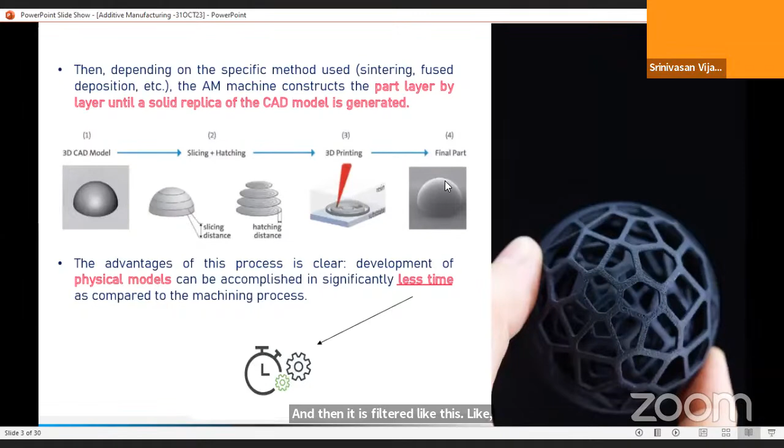This is very important actually. Friends, are you able to see the full screen, or is there any hindrance here? Screen is fully shown, huh? Yeah, full screen visible, sir.

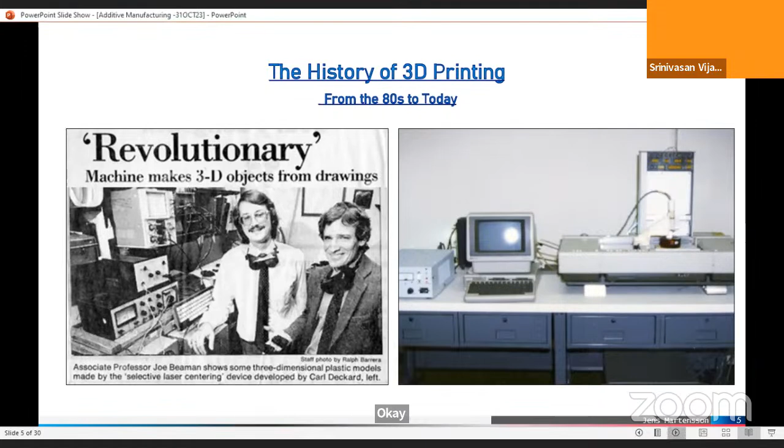What is the use, why is there a need for additive manufacturing? First of all, we have to discuss the negative part of the subtractive manufacturing process, because machining is a subtractive process.

It begins with a solid piece of stock. The machinist must carefully remove material until the desired geometry is achieved. If it is not achieved, or if he makes some mistake, then that part will be rejected. So it is an exhaustive and expensive process. Some complex parts shown here are very difficult to make even by forming processes like casting and machining. It is a tedious process to develop these kinds of components, requiring a higher degree of accuracy for such holes, etc.

So in this case, additive manufacturing significantly replaces other manufacturing processes, especially the other two manufacturing types: subtractive and formative manufacturing.

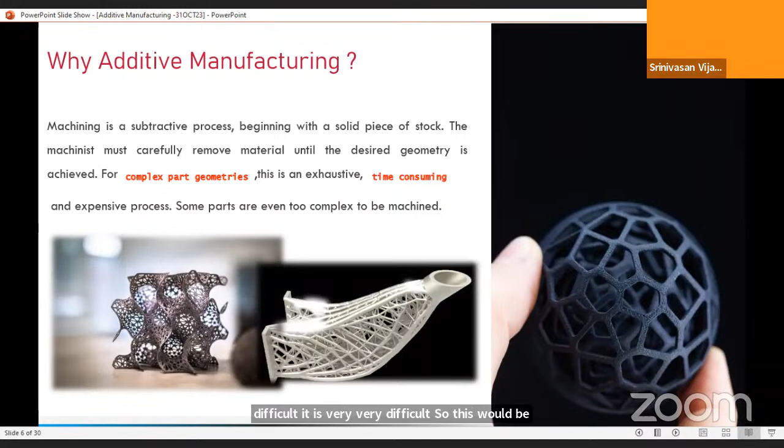Complex geometries are time-consuming in other conventional manufacturing processes. That is the reason why additive manufacturing is very important for the current scenario. If you look into this model, is it possible to manufacture it through forming, casting, or machining process? How difficult would it be? Very, very difficult. So this could be one of the reasons why additive manufacturing is necessary and is the current trend now.

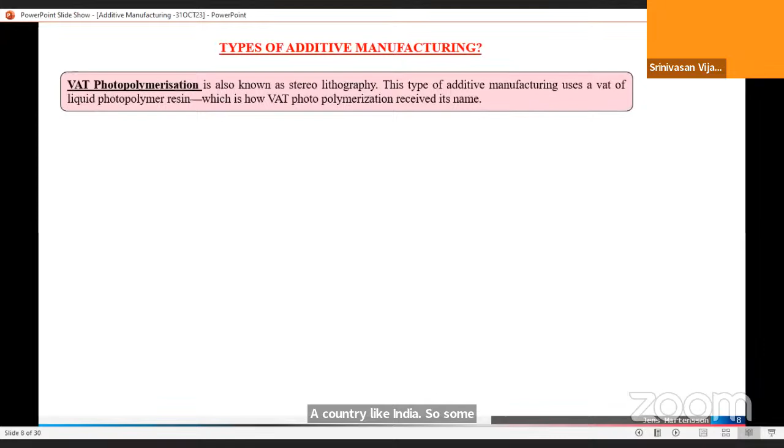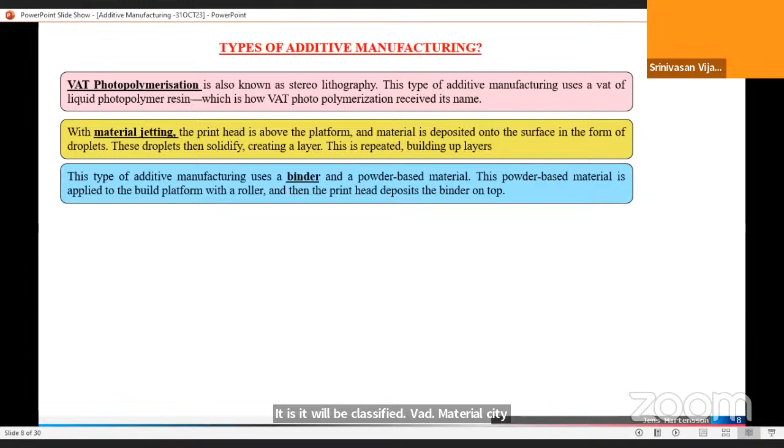Some of the types of additive manufacturing are shown here. It may be classified as VAT photopolymerization, material jetting, material extrusion, powder bed fusion, sheet lamination, and directed energy deposition. The most commonly used process is powder bed fusion, especially in India.

Let us discuss what is VAT photopolymerization, because even though this is important, we must know some introduction about it. It is stereolithography - it uses photopolymer resin.

Whereas in material jetting, the print head is above the platform - we can show it in the diagram. The material is deposited onto the surface in the form of droplets. These droplets then solidify, creating a layer, and this building up of layers is repeated.

The third one is material extrusion. It is used in inexpensive home 3D printers, where the material is drawn through a nozzle, heated, and then deposited in a continuous stream.

And then the powder bed fusion - even though it is costlier, very expensive, it is widely used in India, but you can't get it everywhere. Only one or two facilities in each state, most probably. The two in Chennai or Bangalore, Hyderabad - in metros only we can have this facility, and some other national laboratories have this.

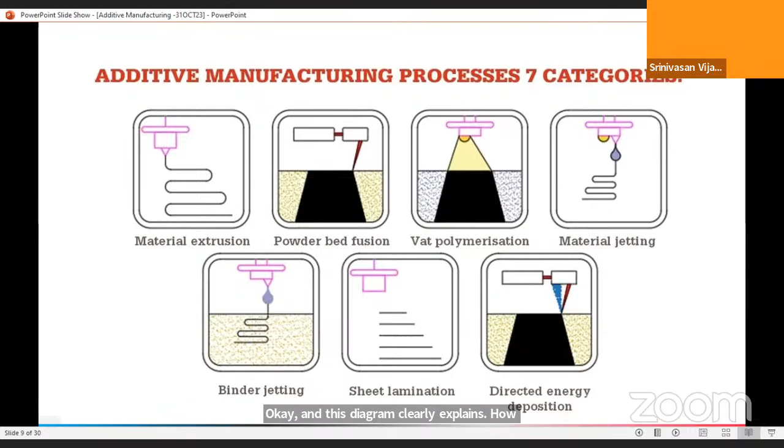And these are the different types of additive manufacturing processes - the diagrams are shown here. I can share the slides later with you. These diagrams clearly explain how additive manufacturing has been classified into these seven categories.

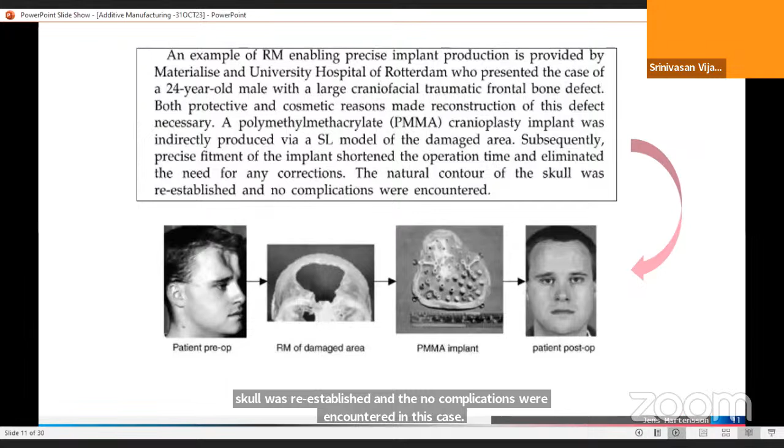What are the recent researches and development in PBF? It is powder bed fusion or laser bed fusion, whatever it is.

Here we have presented two case studies, both taken by my research scholars. One is Subanth Entar, who just completed his research and defended his Viva presentation, receiving his doctoral degree in the title: Impact of Scan Orientation Strategy and Melt Pool Behavior on the Mechanical, Microstructure and Tribological Characteristics of DMLS IN718 alloy.

Don't confuse with that - PBF, LBF, and DMLS all mean the same thing, that is direct metal laser sintering. DMLS stands for direct metal laser sintering. They have also backed a patent and introduced a new scan orientation strategy concept, which is why we have applied for patent.

We fabricated the samples through DMLS process with different scan strategies. First we took the scanning direction at 67 degrees, then scanned at 90 degrees, then combined together both 67 and 90. So we produced three materials and did our research on melt pool behavior, microstructural and tribological characteristics.

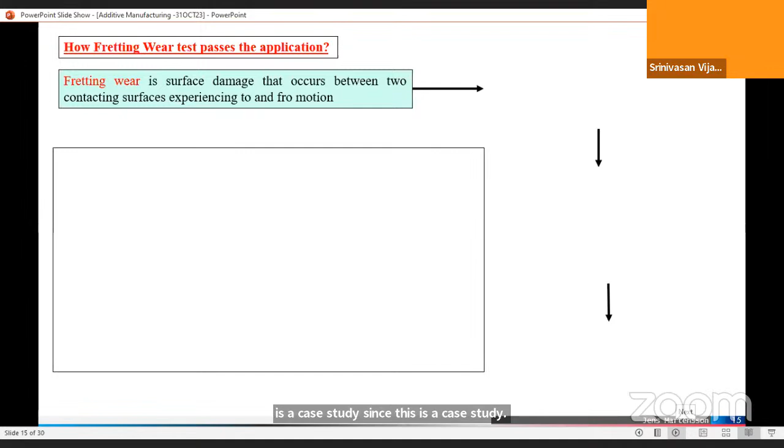So how we made a fretting wear test. Actually, most of the people discuss pin on disc wear test, that is for sliding wear. But in this case, this is a case study. Since this is a case study, we took fretting wear, which is a surface damage that occurs between two contacting surfaces, giving to and fro motion, as shown in the diagram.

There are different types of fretting: tangential, radial, rotational, torsional, etc. This is the exact application in aircraft wing rivets, where we have to specify like this. Youngsters, those who are choosing a problem, have to specify the problem like this: I'm having this problem, there could be some problem.

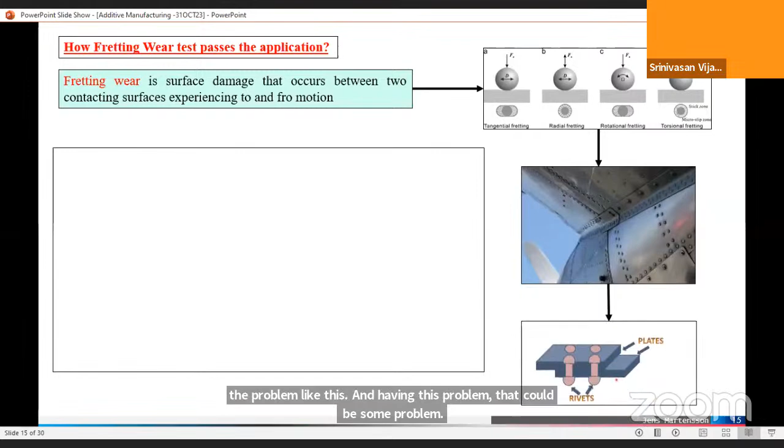We were able to produce a component with a higher degree of fretting wear resistance, and less shear stress in aircraft wing rivet. This is what our study concluded, and we are moving to the second case study, which we are currently involved in.

Another scholar named Mr. Daniel Devaraj is doing this research. We are in the phase where already 2 papers have been published with this, but we are waiting for thesis submission. I want to share some of our experiences, what we did, how we managed to do our research in biomedical engineering. Here, the problems with bio implants are clearly discussed, under different categories we can classify these problems associated with bio implants. These are based totally on reference to some journals.

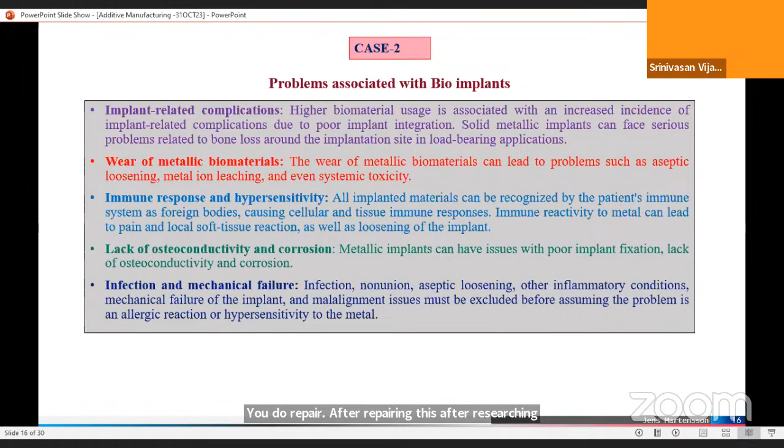Most importantly, I don't know how many of you have come across the term stress shielding effect. It looks somewhat complicated, but it is very simple. Just look at this, this is a femur bone. Look at this arrow mark. This is the femur bone, this is the femoral head, and this is the acetabular cup.

Let us assume I'm placing a titanium or stainless steel implant here. This is stainless steel. The elastic modulus, or stiffness, of stainless steel implant manufactured through conventional processes is around 200 gigapascal, whereas for bone it is 30 gigapascal — nearly 600% difference between the bone and the implant.

So what happens? The stress given to the implant must be transferred to the bone. Then only the bone will grow, and only then will blood circulation get into the bone areas. Otherwise, this implant will shield the load, protecting it from entering the bone. All human bones must experience some kind of load, otherwise bone growth will be affected. This is what we have to look into from a biomedical point of view.

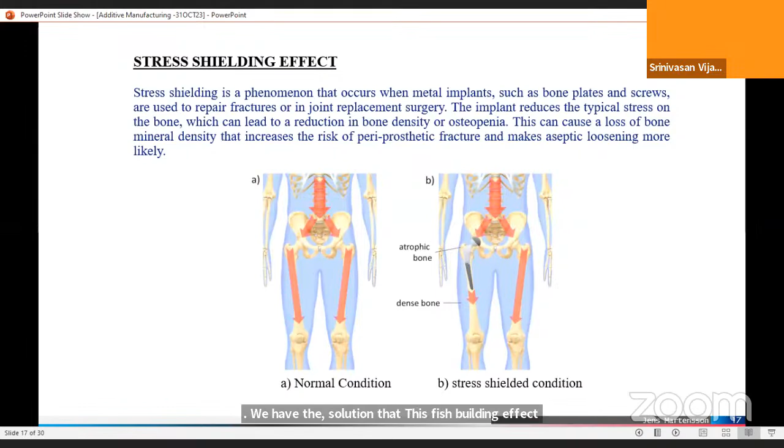But what they might have done is some kind of alternating arrangement — they might have increased the surface roughness. I gathered this from a journal where they modified the surface roughness according to the adjacent bone for the stress shielding effect. But nowadays we have a clear solution: the stress shielding effect can be reduced through the additive manufacturing process. Let me explain how.

So these are the ways to prevent stress shielding in bone implants. Increasing the bone implant contact ratio can help distribute the load more evenly between the implant and the surrounding bone, reducing stress shielding. This can be achieved through proper implant design and surgical techniques. I'll tell you clearly now — after reading this, I'll explain what we did to reduce the stress shielding effect.

Improve implant surface roughness. Modifying the surface roughness of the implant can influence the stress field in the periprosthetic bone tissue. A more optimized surface roughness can help reduce stress shielding and improve the long-term stability of the implant.

We use materials with a closer match to bone. Now the closer match to bone is only beta type titanium, which has low Young's modulus, that is 110 gigapascal, manufactured through conventional manufacturing process. I'll come back to how we can reduce this Young's modulus for titanium further.

And then functionally graded materials, where alternating layers have a gradual transition in mechanical properties from the implant to the surrounding bone. One of my scholars did research on functionally graded material for bioimplants through centrifugal casting. He used magnesium-based composites where he used molybdenum and zinc as a functionally graded material.

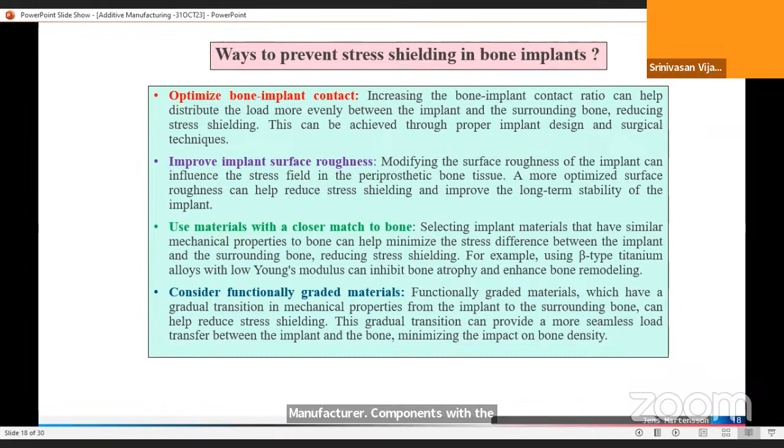And the best solution for reducing the stress shielding effect is to produce components with a higher degree of porosity. That's all, this is the only solution. You produce a component with pores. If you have many pores, the density will be reduced.

Inside the pores, the bone will grow and clump together. That stress attained by the implant will be shared to the bone effectively.

But what is the exact percentage of porosity? We don't know, it is still in research process. In our study, we took 40, 50, 60% porosity. So for that, we have to develop a 3D model.

There are a lot of structures available. Porous scaffold, this is diamond scaffold. This is gyroid structure. Our research, my scholar did his research using this gyroid lattice structure. Using topology software, we were able to reduce it.

Just a minute. Okay.

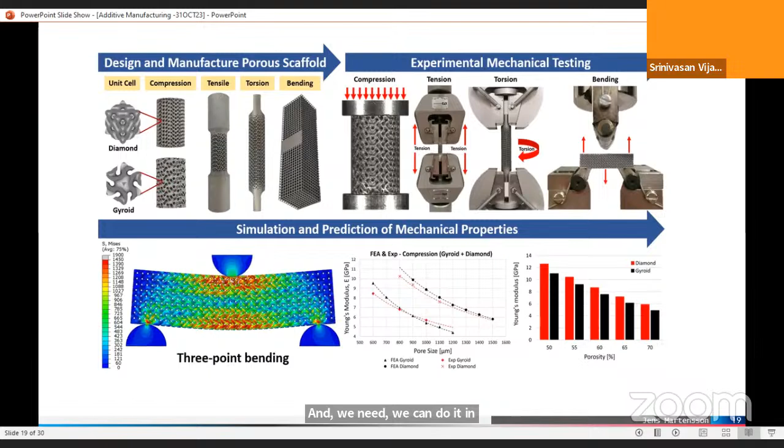Now the current thrust area, let me tell you, a lot of studies have been done in stainless steel. Please leave that aside. We can do it in titanium, and cobalt chromium alloys are the latest trend where the current research is going on.

And we did our research, taking micro hardness. Look at this, for cast titanium alloy, which has 358 micro hardness, whereas these are all gyroid structures with porosity, which retain and increase their hardness, because of metallurgical reasons, as cooling rates in the lower temperature range when critical solid state phase transformation occurs.

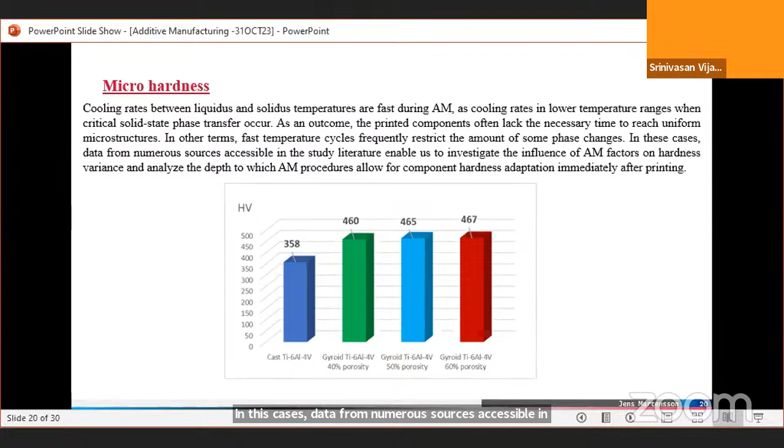As an outcome, the printed components often lack the necessary time to reach a uniform microstructure. That is, fast temperature cycles frequently restrict the amount of some phase changes. In these cases, data from numerous sources accessible in the study literature enabled us to investigate the influence of AM factors on hardness variance, and analyze the depth to which AM procedures allow for component hardness adaptation immediately after printing.

Here I have given the hardness, as well as we did a pin on disc wear test. In the previous case, we did a fretting wear test.

The application is totally suitable for aeronautical applications. In this case, the wear test should be done on a hip joint simulator, which was designed by us earlier, but it was not under working conditions. So we switched over to pin on disc testing. If you look at this...

Sample C, sample B, and sample A. As the porosity increases, the coefficient of friction also increases. Look at this: sample C has very less wear rate compared to others because it has 60% porosity. That is, it has good wear resistance, even though it has higher coefficient of friction.

Why? Technically speaking, people used to think that coefficient of friction is directly proportional to wear rate, but that is not the case. The detached particles might come into contact with the contacting asperities and act as a solid lubricant to reduce the wear rate. So generally, as a blind theory, people use the thumb rule that coefficient of friction is directly proportional to wear rate. That is not the case in pin on disc wear test, sliding wear test.

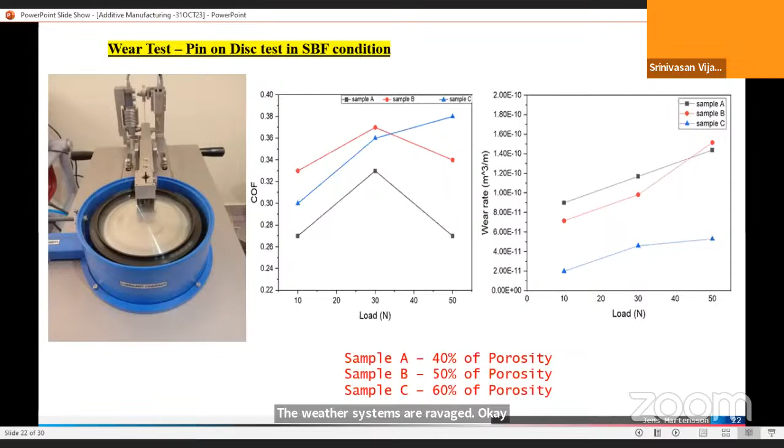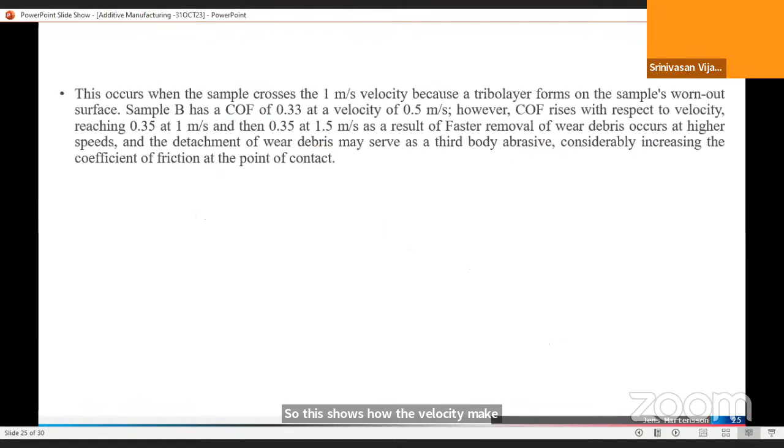This shows how velocity makes an impact on coefficient of friction and wear rate. And these are some SEM pictures showing what kind of mechanism we obtained for these oxide layers, and how the crack is initiated.

Here is the ploughing type of mechanism, here the grooving, and here the materials have been delaminated along the scratch, where we found some oxide particles.

These are some of the wear mechanisms we obtained, and there is some theoretical part which I don't want to go into because we've already spent more time on this.

I hope this presentation has given some glimpse about additive manufacturing and research gaps. Simply, we can classify this: don't choose additive manufacturing blindly and do all tests - tension, compression, tribological - without a plan. Don't do tests like that. Select the problem, derive the objectives, then derive the work plan, and then do it.

In the first part we did tensile studies, in the second part compression studies. In the first case study we did fretting wear test, in the second we did sliding wear or pin on disc wear test. So based on the applications and the problems, you have to select your research area. And whatever knowledge I gather, I share.

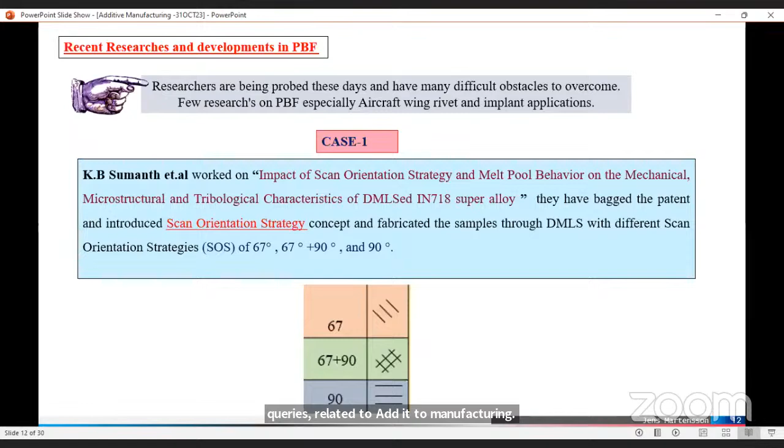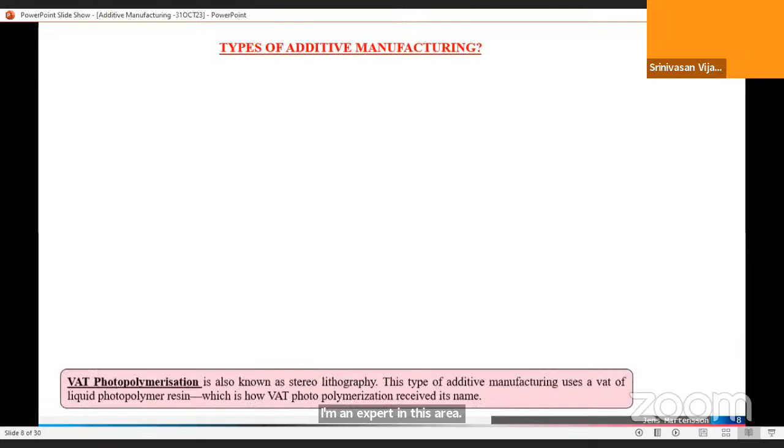Any questions? Even if they are complicated, I cannot claim to be an expert in this area. We recently started this. That would help me also develop my skills and knowledge in this area. So for that purpose, I'm asking - any questions? Please raise questions only.

Kindly introduce yourself. I'm Srinivasan, from Dindigul. So, nowadays most research in bioimplants is going towards magnesium alloys rather than titanium, cobalt, or stainless steel alloys. So is there any work present in India about magnesium alloys, particularly with 3D printing?

Additive printing of magnesium alloys, people are not generally preferring it. They say there is some complexity, and they don't want to take risk. In foreign countries, they are doing all kinds of research.

But in India, we tried almost all over, north to south, east to west. They have some specific limitations. Even in National Institute of Technology, they are ready to do it for stainless steel and titanium, not even titanium actually, stainless steel and aluminum.

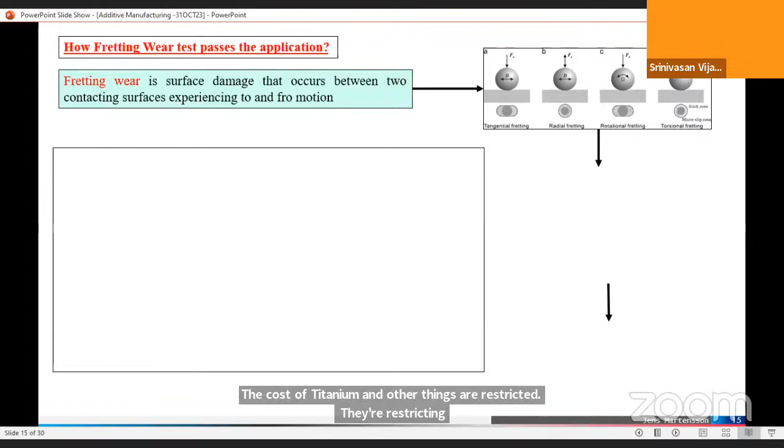They are not ready to do it with titanium. The cost of titanium and other things are restricted, so they're restricting it. If you want it in bulk quantity, then they can do it. Some other institutions are there where they can print titanium.

And now we are trying with cobalt chromium, which the third student has registered under me. She's pursuing research on cobalt chromium. And the first paper, it is Inconel 718 -- am I right? That is for aeronautical applications.

That is also possible, but whatever the material, you are talking about bioimplants. My suggestion is bioimplants. If you are going for bioimplants in additive manufacturing, only titanium and cobalt chromium are currently available. Otherwise, definitely it is 10 to 15 folds costlier than the conventional casting process.

Functionally graded material, where you can develop magnesium -- this is my suggestion outside of this topic. If you want to do functionally graded material to reduce the stress shielding effect, you just try it in magnesium.

That is a new area where we have also tried actually, and we got successful results, because the density is very low here, isn't it? Yeah, that is good, we need lesser density only. At the same time, we should not compromise -- we need minimum strength only.

The desired property of the bioimplant is we need hardness. It won't bother because higher hardness means wear resistance should be good, since there will be some sliding parts. Besides that, you have compressive strength -- you are going to test the compressive strength -- and the porosity should be higher, so that it enables the bone to grow. That is very important.

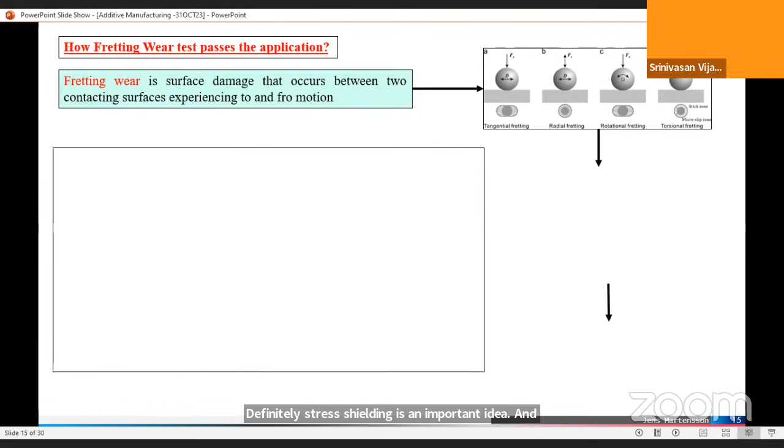Definitely, stress shielding is an important criteria, and one of the topmost criteria -- stress shielding should be addressed. Without addressing that, going forward -- I didn't put the statistics, but the failure of implants, or the lifetime of implants, is almost 10 to 15 years only in India, currently. I studied this, I don't have any data, but I studied it. We need to increase the time cycle.

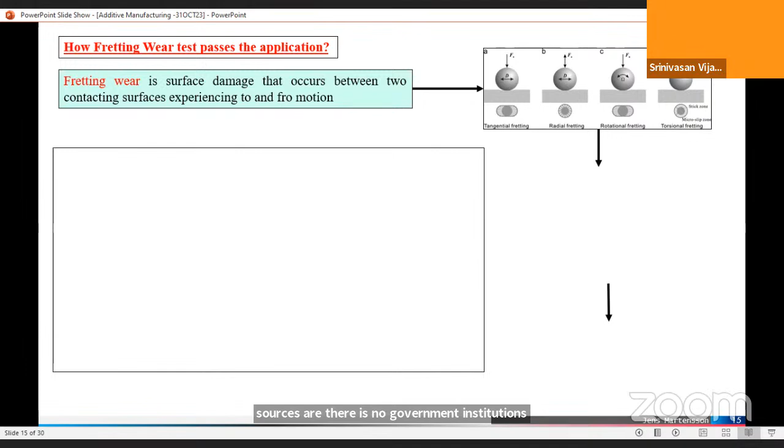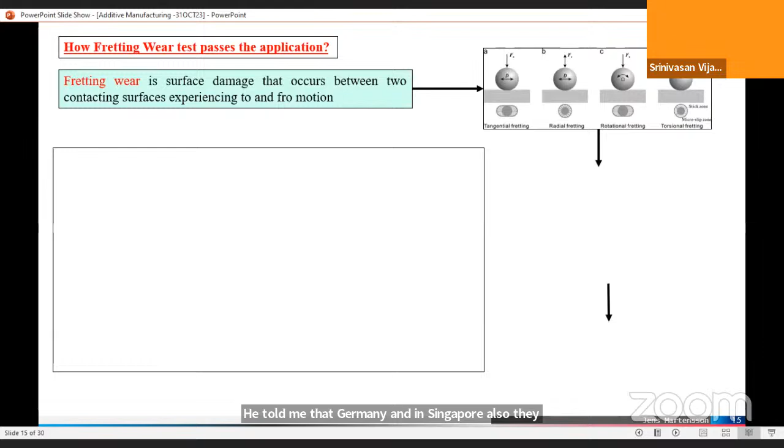I think Germany is the leader. Yesterday I discussed with one of my students, who told me that Germany and Singapore are producing vast varieties of these things. Even in Japan there will not be any restriction. In US that is not a problem. But in India, the cost of manufacturing is very, very high.

If we produce the same component within 10,000 or 5,000 in magnesium or titanium, whatever it is, if we go for additive manufacturing, it goes around that. Even both the students have spent nearly 2 lakhs for that component manufacturing itself.

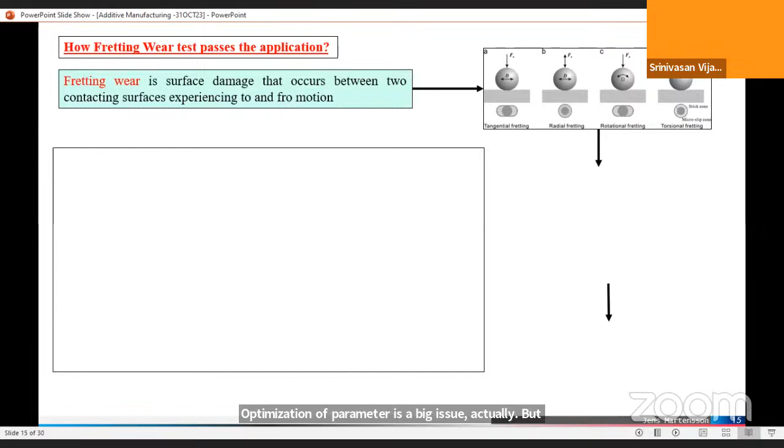Optimization of process parameters is very important, where we need a higher degree of wide, comprehensive studies. Optimization of parameters is a big issue, but we choose someone's optimized parameter and we are doing it. For aeronautical applications and other things, the optimization of process parameters is very important, and it needs a wider degree of research, which would cost around 5 lakhs or 10 lakhs if you want to go for optimizing the process parameters.

As far as bio implants are concerned, there is no need for optimizing the process parameters, because we are not going to enhance the mechanical properties — we are going to step down the desired properties. That's why I took two different case studies: one with enhanced tensile strength and mechanical properties, and another with decreasing mechanical properties. I gave two different scenarios for the same process.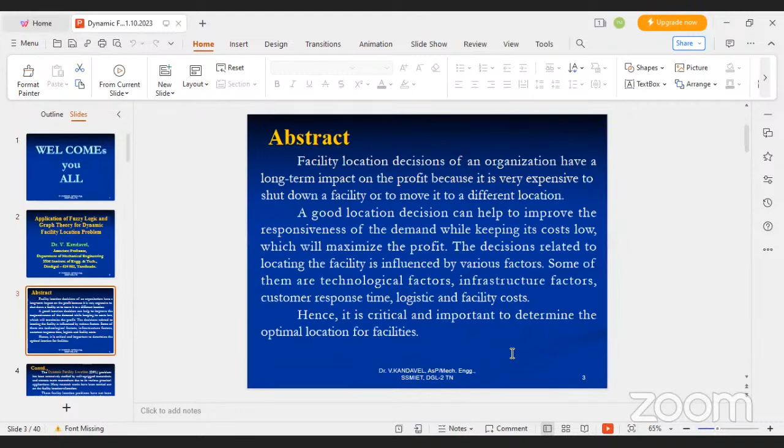Good evening, sir, Kandavel sir. Yes sir, I'm available, good evening. Shall I start, sir? Yes, you can. You can share your screen. Oh yes sir, sure. Is it visible, sir? Yes, visible, but make it full screen. Is it okay now? Yeah fine, sir. Okay, welcome all, wait sir, shall I just start? A minute, sir, let all be available. Okay, thank you.

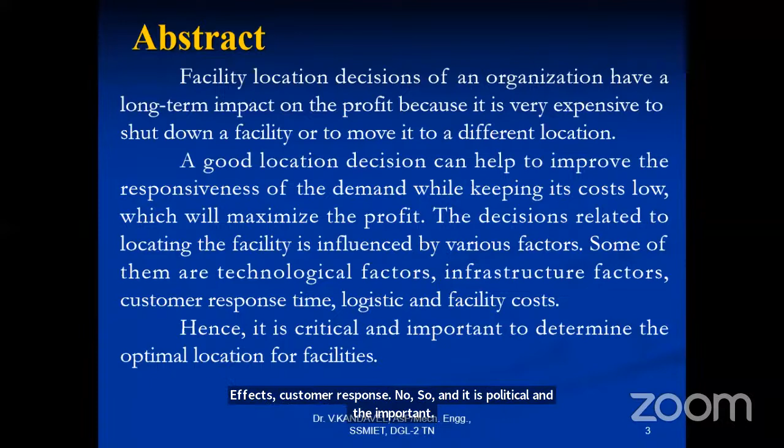Decisions related to locating facilities are influenced by various factors, such as technological factors, infrastructure, customer response time, logistics, and facility considerations. So it is critical and important to determine the optimal location for facilities.

Dynamic facility location problems have been extensively studied by researchers due to their various practical applications, so many literatures have been carried out in different locations.

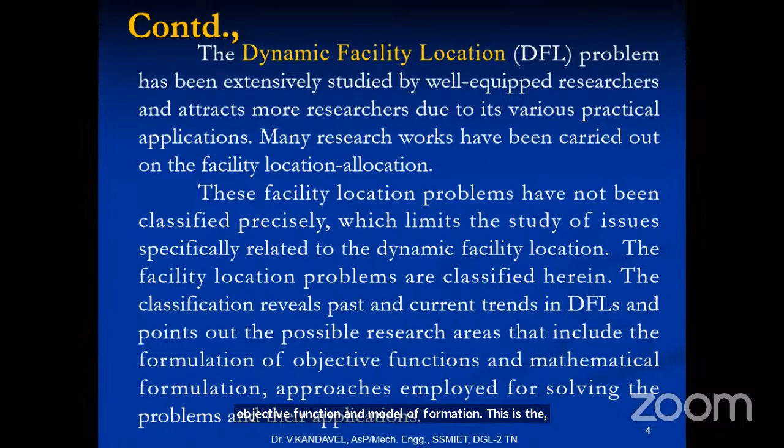These facility location problems have not been classified precisely, which limits the study of issues specifically related to dynamic facility location. So the facility location problems are classified herein. The classification reveals the past and current trends in DFL, dynamic facility location, and points out possible research areas, including the formulation of the objective function and model formation. This is the major criteria for formation of the problem in my research.

This research work focuses on the development of methodology for solving the dynamic facility location problem while considering all issues related to real-time facility location.

A fuzzy logic-based approach and graph theory have been proposed to solve the dynamic facility location problem. The performance of the two methodologies are compared and analyzed for solving the dynamic facility location problem.

From the comparison, it is concluded that large size problems are easily solved by fuzzy logic, whereas small size problems are solved by graph theory. It's very important: large size problems are easily solved by fuzzy, and small size problems are solved by graph theory.

So these are the simple keywords: supply chain management, facility location, dynamic facility location, graph theory, and fuzzy logic.

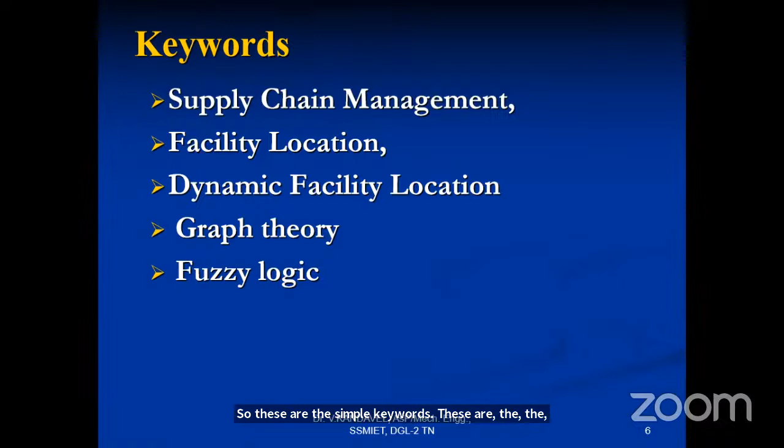The firm must decide where the facility should be located, or where to relocate existing facilities. This is the main task of our recent criteria in any business.

Facility location problem deals with the decision of locating the facility, which can be a plant, warehouse, distribution center, etc. So these are the facilities: plant, warehouse, distribution center, etc.

Hence the decision related to the location of the facility is a strategic decision, particularly for the service organization, in which the location of supply sources and markets, and location of potential facility sites, are considered.

Demand forecast by markets, facility labor and material cost by site, cost of transportation between each pair of sites, inventory cost by site, as well as function quantity, sales price, and production of different regions, along with response time and other service factors, are important.

While establishing a facility, the main concern is to minimize cost and maximize profit. There's literature on this, Singh et al. 2006.

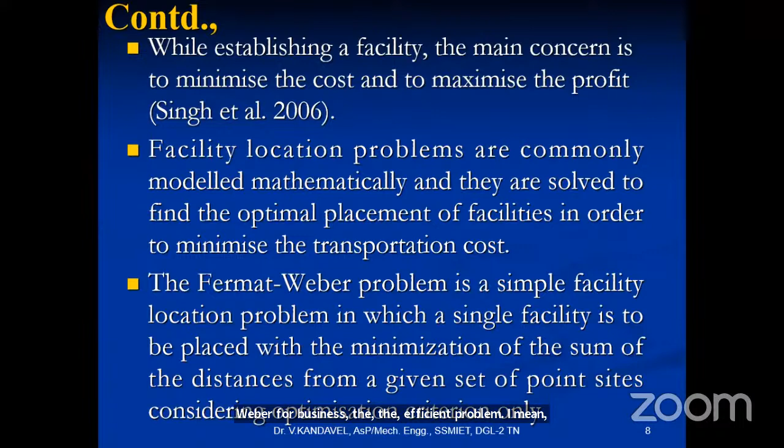The Fermat-Weber problem is simply a facility location problem in which a single facility is to be placed with minimization of the sum of distances from a given set of point sites.

Next, more complex problems go beyond the single facility problem, considering the placement of multiple facilities, constraints on the location of facilities, and optimization criteria. The facility location problem generally consists of a set of potential facilities L, which can be opened, and a set of demand points D to be served.

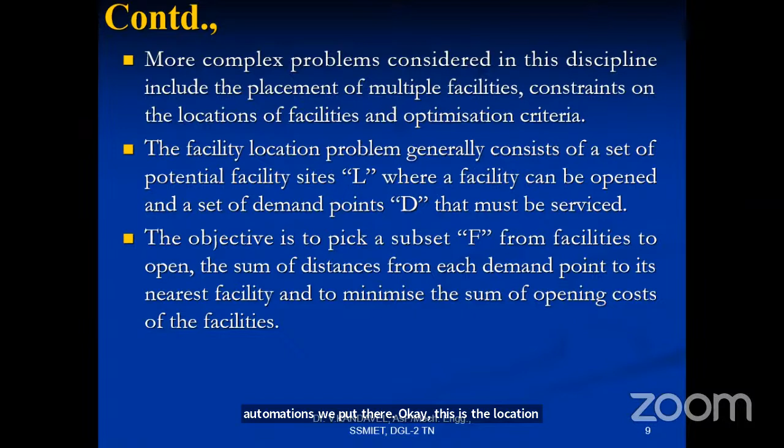So simply put, the objective is to pick a subset of facilities to open, minimizing the sum of distances from each demand point to its nearest facility, plus the sum of opening costs of the facilities.

Now, supply chain management is a major part. Supply chain management is the flow of goods, which includes the movement and inventories of raw material and work-in-process inventory, from point of origin to point of consumption.

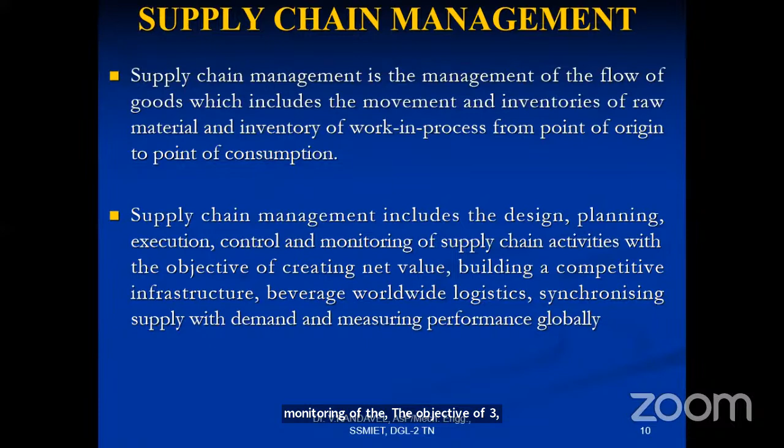Supply chain management includes the design, planning, execution, control, and monitoring of supply chain activities, with the objective of creating net value, building competitive infrastructure, leveraging worldwide logistics, synchronizing supply with demand, and measuring performance globally.

So this is the main criteria and the subsystem of the facility location.

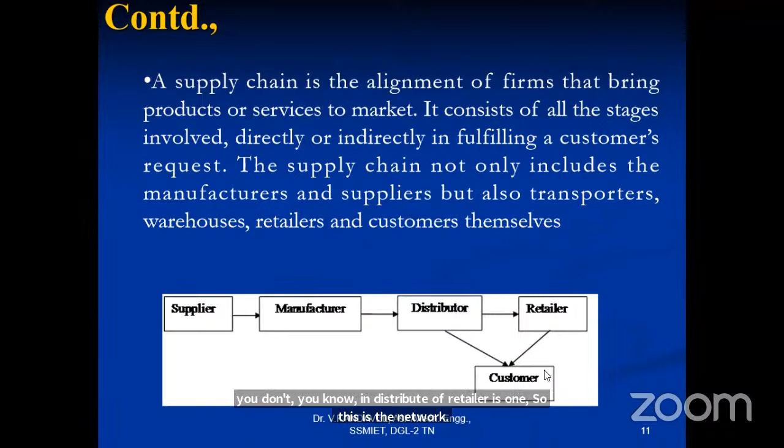So the reason for the dynamic facility location problem: why do we go for dynamic facility location? Time is the major concerned element. Depending upon the time, the facility can be changed. So a static facility location problem can be transformed to an equivalent dynamic facility location problem. Both space and time can be analyzed by discrete and continuous aspects. We know very well that the dynamic part is changed into static, and only then do we solve the problem, isn't it?

So dynamic models have a leading role in strategic planning and decision making for facility location problems, and they are gradually becoming more important due to that facility location problem. So the advantages of the dynamic facility location.

There are a lot of advantages. The dynamic facility location not only looks for the optimal location of facilities, but also tries to optimally assign facilities to customers in order to fulfill their demand. This problem minimizes the total cost incurred by the allocation. The dynamic facility location problem is to locate the set of new facilities such that the transportation cost from facilities to customer is minimized. In the capacitated problem, the allocation of facilities to customer may be constrained due to the capacity limitation of facilities.

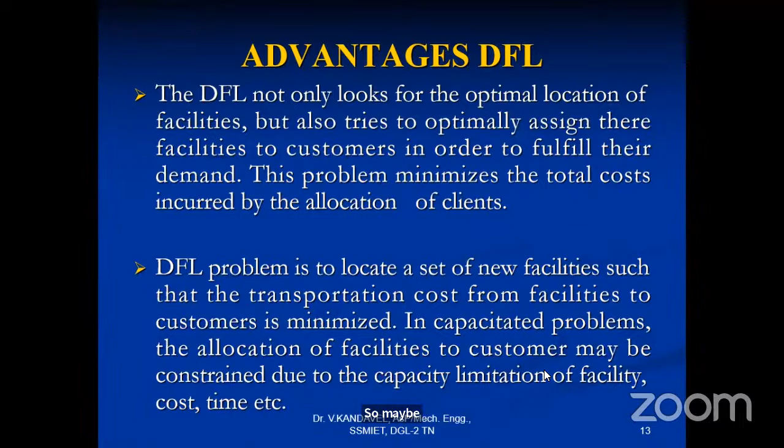Then for the literature review, finding the gaps: facility location problems have been extensively researched in the last 3 decades, as presented in this literature. Facility location problems are widely studied. The optimization problems, the different types of facility location, allocation problems, or location problems discussed in the literature can be found in the book Verter 2011.

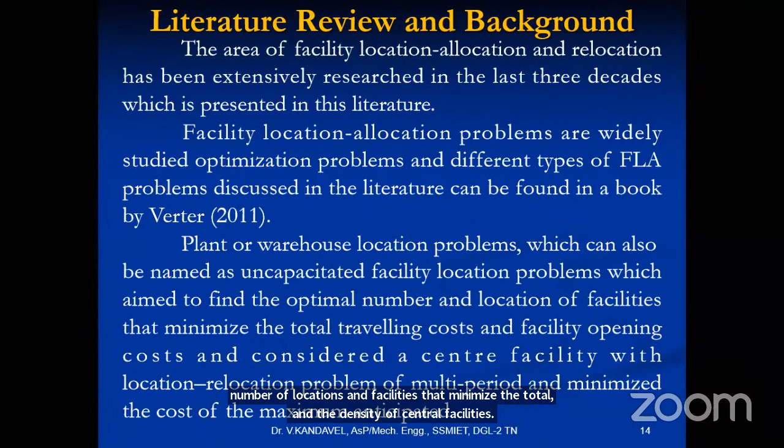Problems related to space alone are called static, and those that pertain to both space and time are dynamic. So we know the difference between static and dynamic. Based on this, the facility location problem can be classified in the literature. Arabani and Farahani, the base paper of literature 2012, classify it into static facility location problem and dynamic facility location problem. Many researchers address the static facility location problem considering conditions such as continuous space, discrete space, and network space location problems. See ReVelle et al. 2008.

So there's a research gap. The main concept is that the dynamic facility location problem is classified into two parts: one is the mathematical approach, and the other is the solution methodologies. There are a lot of mathematical approaches: quadratic problem, branch and bound, binary decision variable, integer program, linear program, and graph theory model. The integer programming is further divided into two categories, and linear programming is further divided into three.

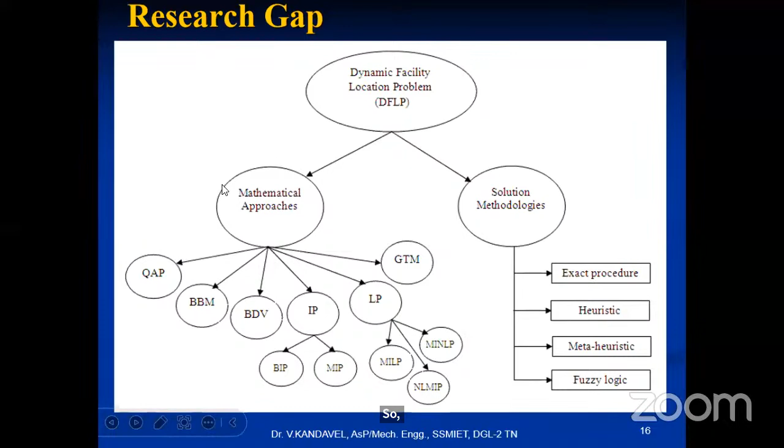In order to carry out further studies in the case of dynamic facility location problems based on the available research gap in the literature, this section brings some research and development. One of the areas requiring more attention is how to combine continuous models with dynamic problems.

At first glance, it might be perceived that the essence of dynamic problems depends on discrete models. Even though the interaction of continuous models with dynamic problems can facilitate favorable results, it's also notable that we ignored parameters such as availability, utility, and other criteria that shall lead the study to location and allocation relocations. Therefore, only the parameter of minimizing cost for distance is considered.

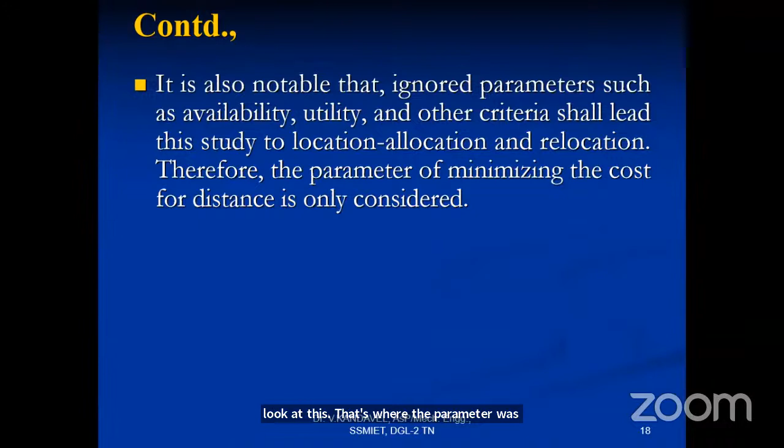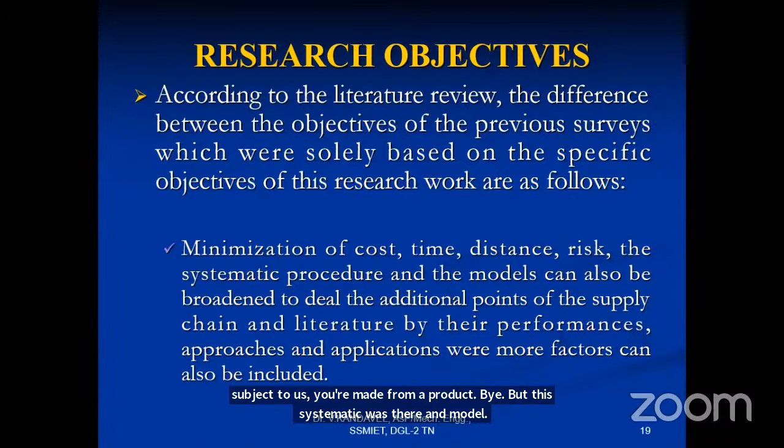The cost is considered for distance. Next, the main objective of this research, according to the literature review and the difference from previous surveys which were solely based on specific objectives, is as follows: first, minimization of cost, time, distance, and risk. The systematic procedure and model can also be broadened to build additional points of the supply chain and literature by their performance, so approaches and applications with more factors can also be included.

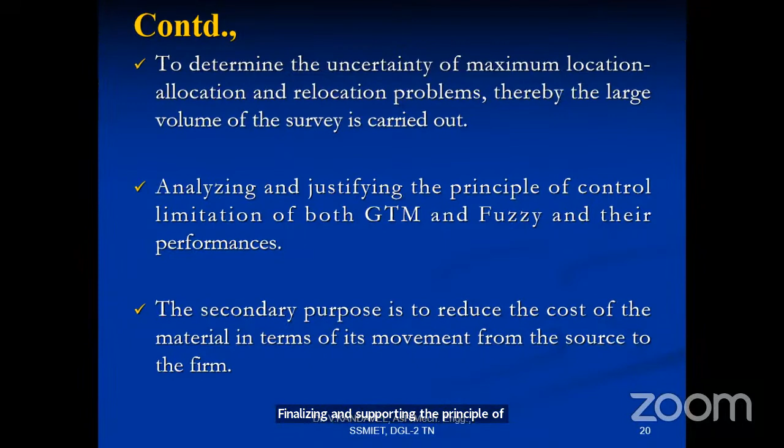Then, to determine the uncertainty of the maximum location problem, a large volume of surveys were carried out here, analyzing and justifying the principle of control limitation using both graph theory models and fuzzy performance. The secondary purpose is to reduce the cost of materials in terms of movement from source to the firm, which is very important.

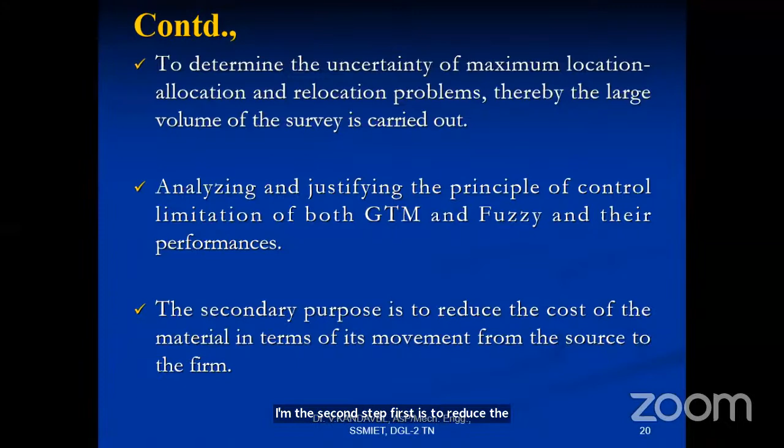Regarding the communication of this graphical theory, the main objective function has not been truly considered, neither from the viewpoint of model analysis, computational complexity, and classification, nor from the viewpoint of the algorithm, plus both theoretical and practical considerations that suggest it would be worth studying.

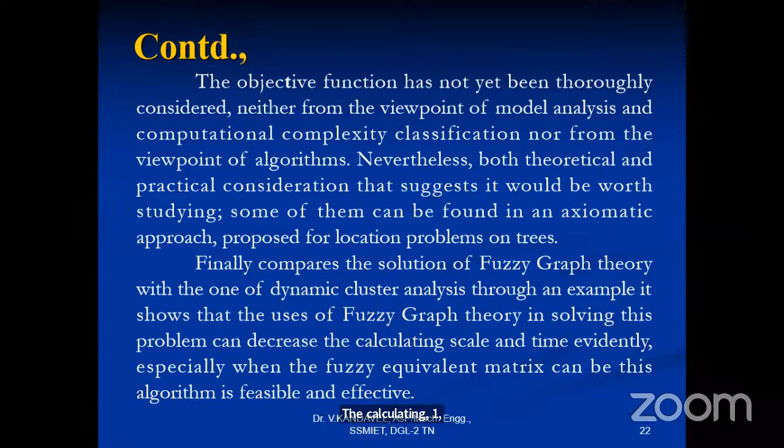Some of these approaches can be found proposed for the location problem on trees, mainly the graph theory trees model. Finally, comparing the solution of fuzzy graph theory with dynamic cluster analysis, through an example, the use of fuzzy graph theory in solving these problems can decrease the scale and time needed, especially when the fuzzy equivalent matrix can be used in this algorithm for calculating. This is the main objective function of the graph theory model.

So, minimum of Z. These are the objective functions where Z is the traveling cost, ti is the transporting distance, dj is the demand, I is the distance traveled between the locations, and J is the demand between the locations.

This is subject to the capacity of the warehouse being equal to the demand for the customer. This is objective one of this assumption, where average travel distance should be minimum.

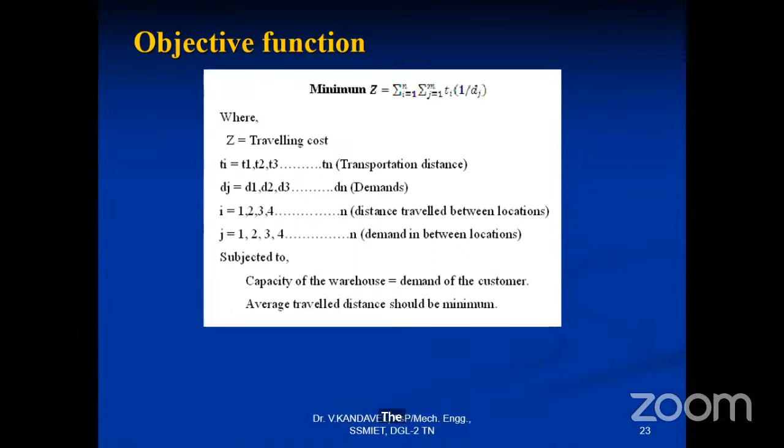Then comes the last type of problem. Recently, for facility location purposes, very promising and different fuzzy approaches have been employed. New results from 2008 solved the supply chain network design problem in the Chinese liquor industry, a beverage industry, using a multi-objective mixed integer programming model to minimize total cost and maximize customer services. Finally, based on fuzzy subjective attribute weights, the fuzzy model has less complexity, and both market supply and customer demands are treated as fuzzy variables in the model.

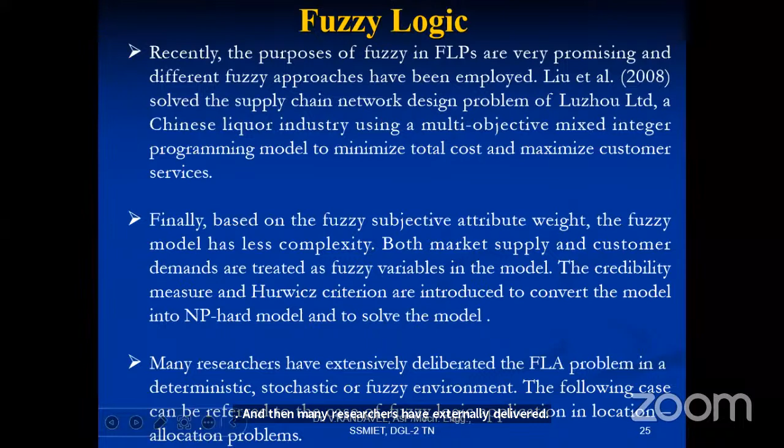The credibility measure and Hurwicz criterion are introduced to convert the model into an NP-hard model to solve it, so this problem is NP-hard here. Many researchers have extensively deliberated on facility location problems in deterministic models. The following cases are very important for specific location problems.

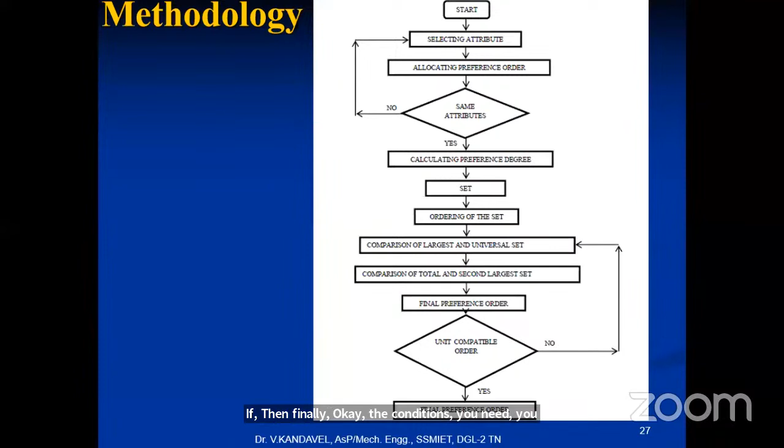If another comparison of total and second largest set is needed, then finally the preference order, then the condition for a unit compatible order. If no, then further comparison of largest and universal set is done, and if yes, this is the methodology for the fuzzy model of the facility location problem.

So some results and discussions: the total cost is shown like this. The x-axis is the distance in kilometers, for this facility location model. A simple graph is plotted showing the relationship between distance and total cost.

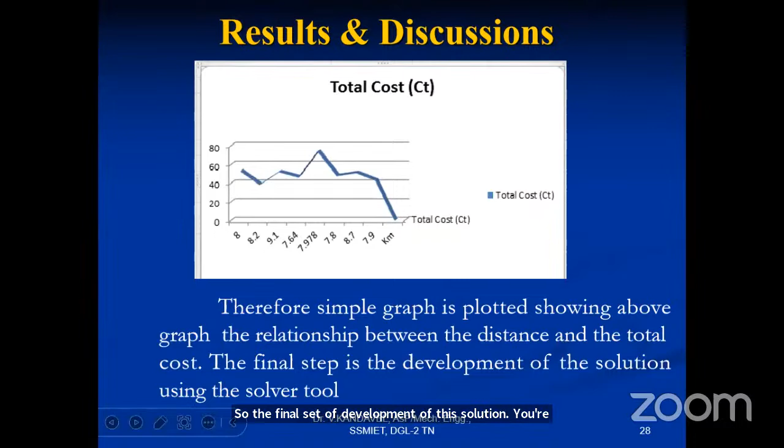The final step is the development of the solution using the solver tool. Another important result is gained from the 3D plot, which is assumed to be the theoretical value that can be implemented in any practical decision-making process to save time, and it also helps reduce cost.

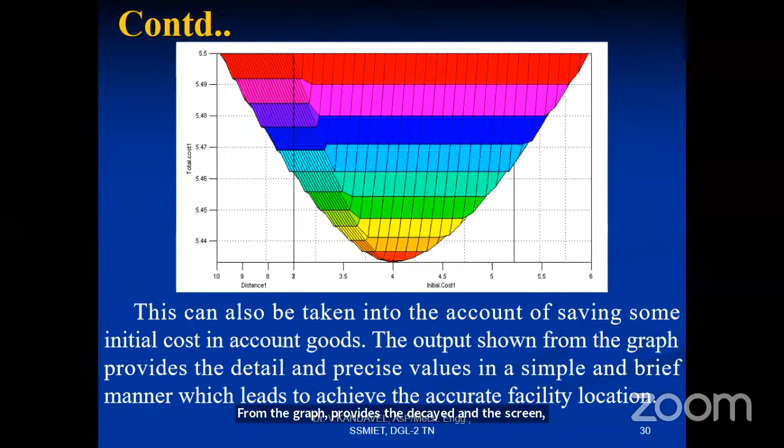This resultant peak point, obtained near the front bottom, means that the solution is optimal and can be used for better solutions.

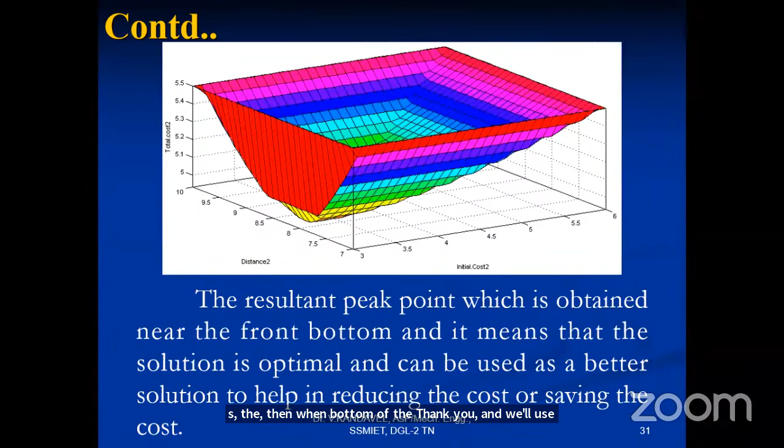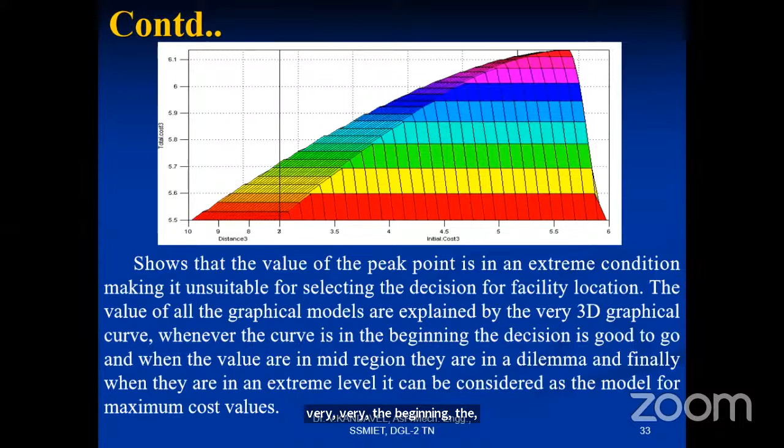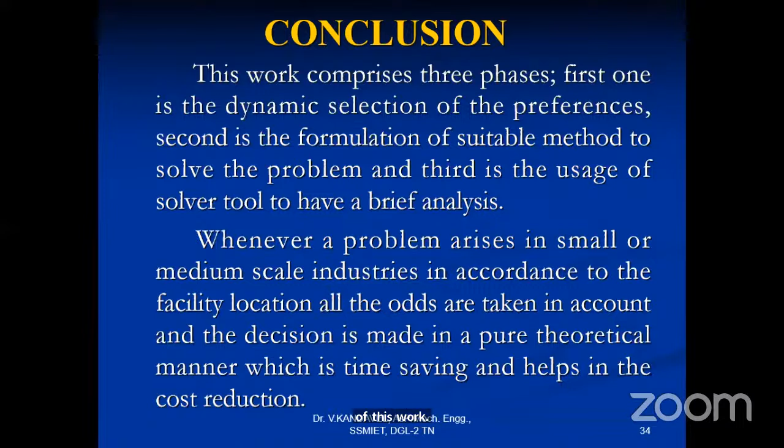So for the simple calculation of results and discussion, the main conclusion of this work comprises three phases: first, the dynamic selection of the preference; second, the formulation of a suitable method to solve the problem; and third, the use of a solver for brief analysis.

Whenever a problem arises in small to medium scale industries regarding facility location, all factors are taken into account, and the decision is made in a purely theoretical manner, which helps save time in locating facilities. This work is reviewed with two different approaches to originate an integrated location-routing model.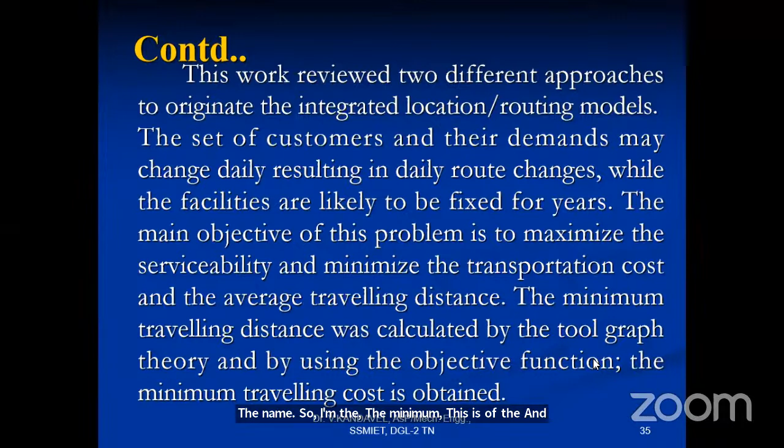The set of customers and their demands change daily, resulting in daily route changes, while the facilities are likely to be fixed for years. The main objective of this problem is to maximize serviceability and minimize transportation cost and average traveling distance. The minimum traveling distance is calculated using graph theory and the objective function to achieve the minimum.

Further, the problem of selecting the preference can be solved using fuzzy preference. The accuracy of results from the fuzzy algorithm is higher than results from optimization methods, and it can be used to solve real demand multiple facility location problems. Using the obtained transportation cost performance, the existing network can be improved by combined facility location, which is extended work.

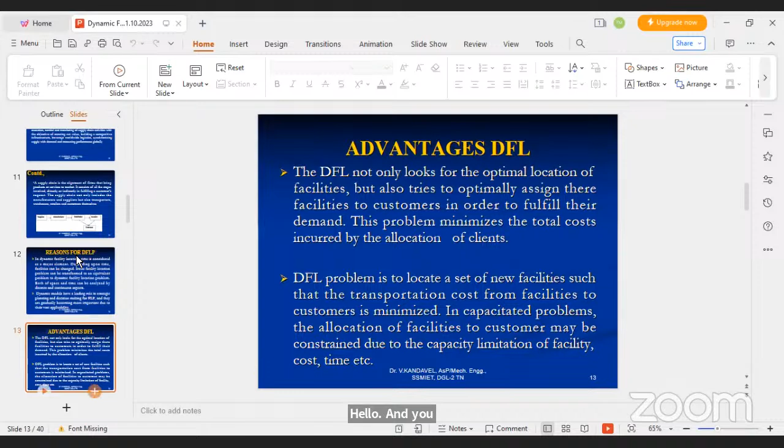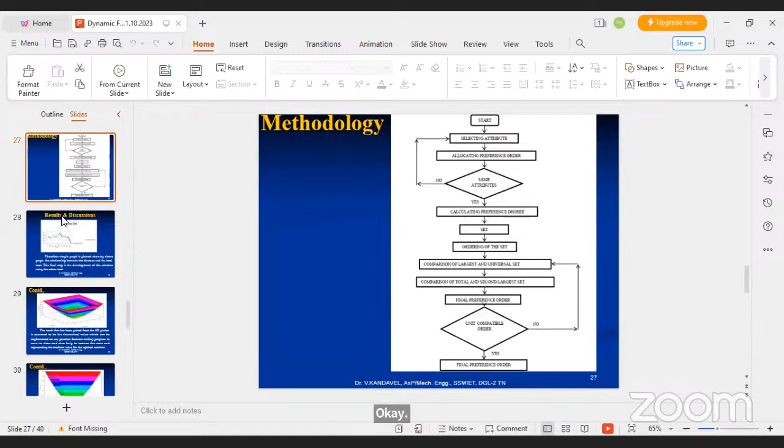Okay sir, then one more thing, sir. To find the best solution, which method should we use? Whether we should use the mathematical approach or solution methodology—that means fuzzy logic or meta-heuristic. Which method will give us the best solution, sir?

Fuzzy method, sir, because I'll explain in detail in the literature also. These are the methods for near optimal problem solutions—mathematical near optimal, that is fuzzy, integer programming, linear programming methods. These exact solution methods were there, and even fuzzy also gets a near optimal solution. Heuristic and meta-heuristics are near optimal solutions, which may be more or less sometimes.

Okay sir, for large size problems we will use fuzzy logic and meta-heuristic, right? Yes sir. Okay sir, thank you sir. Thank you Mr. Sanjeev, tell me sir.

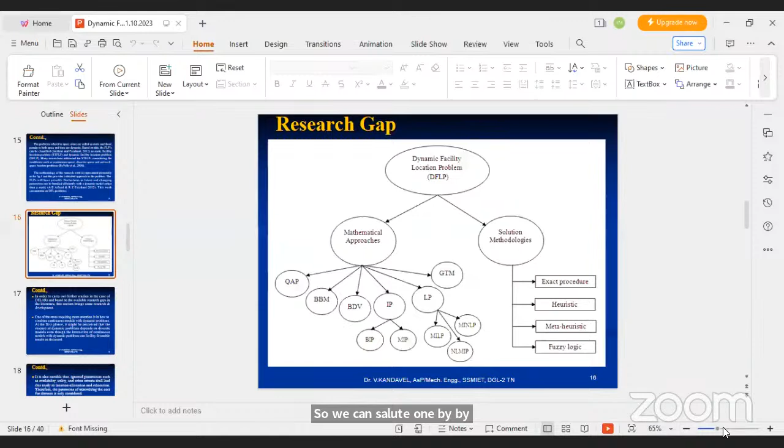The model itself is a fuzzy model, so we can solve it only by fuzzy means, not by any meta-heuristic methods. If it is a mathematical model, a simple mathematical model, then you can go for meta-heuristic methods. But the problem itself is fuzzy, and the model itself is a fuzzy model, so you can seek fuzzy solutions only.